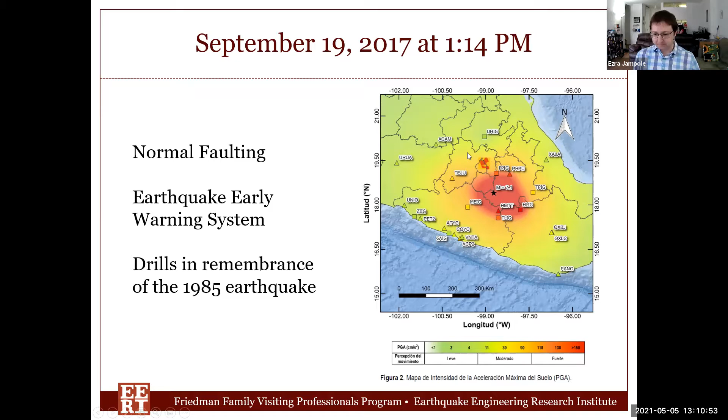Mexico City was not always a solid city. It was an island in the middle of a lake where the Aztec capital of Tenochtitlan was. The Spanish gradually filled in most of this lake to control flooding, and the consequence is that Mexico City looks like this today. Unfortunately, that filled in land has very soft soils.

So when earthquakes come, there tends to be quite a lot of damage that targets buildings of particular periods in Mexico City. This is something we saw in 1985, and this is something that we saw in 2017 as well. I'll show you a couple examples of the structures that the reconnaissance team saw while we were there.

This one is an auto repair building. One thing you may notice is that the upper levels of the building seem to have a lot more walls than the lower levels. This first level just has these small columns. This is something we call a soft story, where there's this vertical irregularity in stiffness.

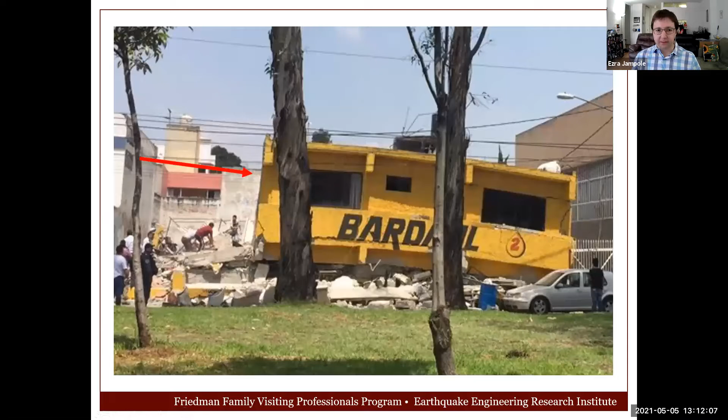What tends to happen in an earthquake is it will concentrate the damage at the weakest level, which in this case is this first level. Sure enough, that first level collapsed, and I believe a couple people were killed in this structure.

If we look at the actual site, after the rubble was cleared, we can see a couple things that are concerning. There's unreinforced masonry, and there also are some columns that don't have any stirrups. That means shear is not transferred very well through those, and they are quite weak.

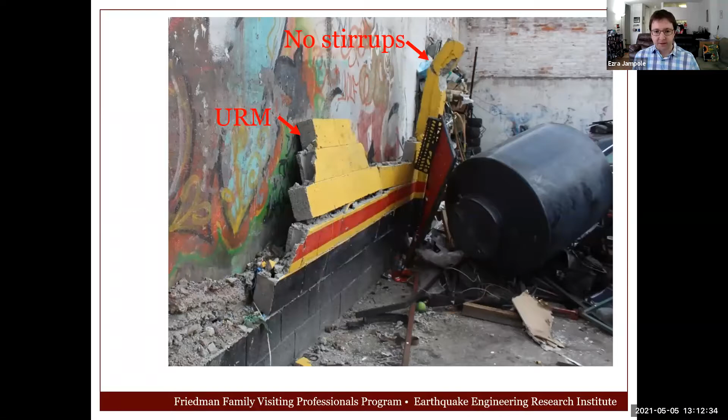Here's another example of a structure in Mexico City. One thing we often see when we have rows of buildings, and that's common in Mexico City and also certain cities in New York, is that the building at the end of the row will be most damaged in earthquakes. They act as a fuse for the rest of the row. You can think about it like a building being confined by other structures on the side of it.

In this case, this building was not at the end of the row, but it extended taller than the building at the end of the row. So the first couple of levels were confined, but the ones above it were not. Sure enough, we saw a collapse at this particular level in this building.

To tell you a little bit more about the study our EERI team did, we focused on areas where there were seismic recording stations, because that enables us to know with some certainty what the intensity of the earthquake shaking is. We went to 13 recording stations and investigated all the buildings around each station, giving us many data points on building performance.

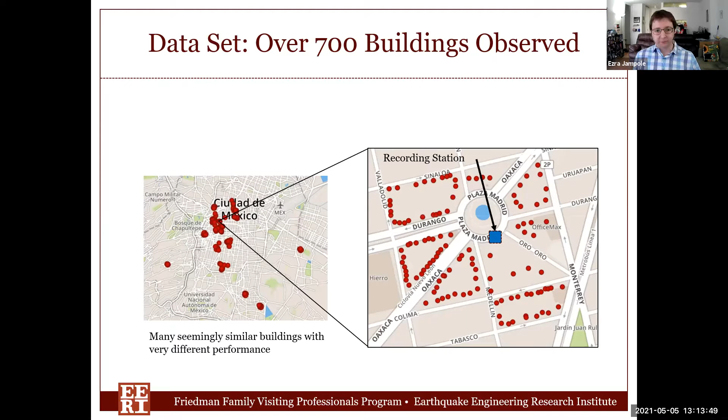This includes buildings that were damaged and buildings that were not damaged, as well as buildings damaged to various degrees. We recorded various attributes of the buildings, and we were able to use that to construct fragilities that relate the probability of some occurrence to an intensity of earthquake shaking.

We're using average spectral acceleration, which the seismic design team may be somewhat familiar with. We can divide that by buildings built before the '85 earthquake versus after, and by different heights, which is quite important because the earthquake, when it comes in contact with soft soils, tends to target only buildings with certain periods, and period is tied to height quite closely.

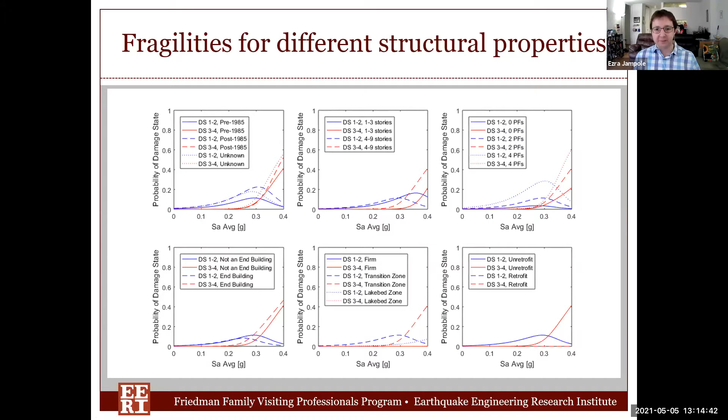So I hope that gives you a sense of the types of things that happen on EERI reconnaissance trips and the type of things that can come out of them.

Lastly, some of my more recent involvement is I was co-chair of the Younger Members Committee of EERI until about a month ago, and thankfully I'm no longer co-chair—it's a bit of a time commitment.

Something folks on the call may be interested in is EERI's travel study program, where if you're not experienced in earthquake reconnaissance and want to get experience, or you're just interested, you can travel to different areas with a group and tour relatively recent earthquakes and look at how the area has recovered long term.

I was part of that program, going to New Zealand in 2019. Here's a photo from that trip next to some fault scarp at the Leader Fault, which was a new fault from the 2016 Kaikoura earthquake in New Zealand.

So I hope that has convinced everyone to become a lifelong EERI member. There are really a lot of benefits to being an EERI member: the interdisciplinary aspect, outstanding technical journals you have access to, webinars, seminars like this one—unless you're sick of me by the end, in which case maybe that's not a benefit.

EERI as an organization provides a very clear path to transition from being a student member to a professional member, through things like the seismic design competition, the Student Leadership Council, younger members committees, and other committees that tend to be very welcoming of younger members. So if folks are looking to get involved in professional organizations, the barriers for entry in EERI are much lower than in some other organizations.

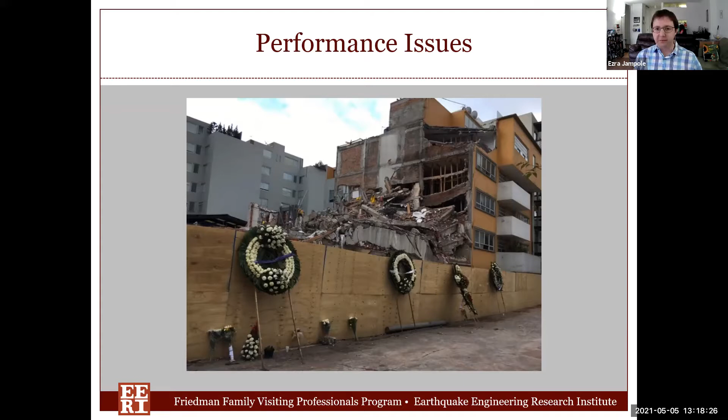There are a number of different fundamental issues that arise, and I'll show examples of all these, but I'd like to talk about them in a more general sense first. There's performance issues, and that's when a building has not performed the way that it is intended to perform. This is an example of that - another photo from Mexico City where a building collapsed.

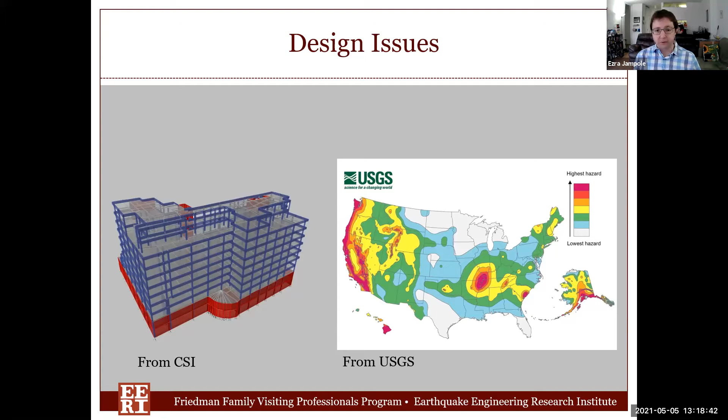There are design issues. So if something has not been designed the way it was supposed to be designed, say after it's built, there are concerns that it wasn't designed properly and it couldn't take the earthquake loading that it's required to, or other things similar to that.

So I designed and built a mechanism to pull laterally on those panels in place in the functioning office building and see if they could take the load or not. The coolest part was that I modified a tripod game hoist that usually is used to string deer, which quite frankly is disgusting to me, but it turns out to be a very effective device for testing whether or not panels can take code prescribed loads.

Getting away from this kind of silly example that was all too real for a while, construction issues often crop up related to delay cases. Contracts almost always specify that if construction work is completed early, then there's some benefit to the contractor. If it's completed late, then there's some benefit to the owner. We will often investigate if there were delays on a project, what the causes of those delays were - say it's the owner or the contractor or some supplier - and that has pretty large financial implications.

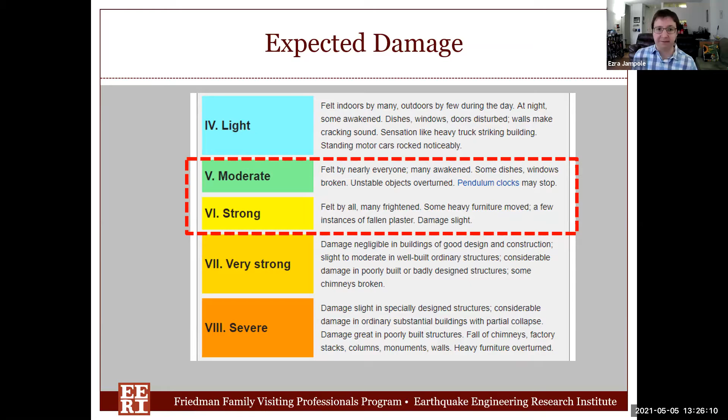This is something I talked about earlier, that the building at the end of the row can be a fuse. And we also see, and it's hard to see in a photo but it's easy to see in the field, that the building was leaning at least 1 degree, which is not good. So this is a building that is clearly compromised.

It's unreinforced masonry. I would not advise going into this structure. And sure enough, it actually blew over, or the front facade blew over in a windstorm less than a year later, and it since has been torn down.

So that should give you a sense that for a building like this, an unreinforced masonry building that's old, built turn of the century—the turn of the 19th century, sorry, turn of the 20th century, not turn of the 21st century—that there can be some real damage to structure.

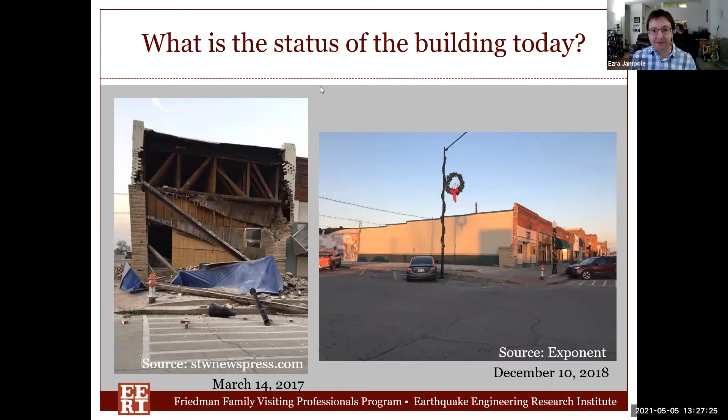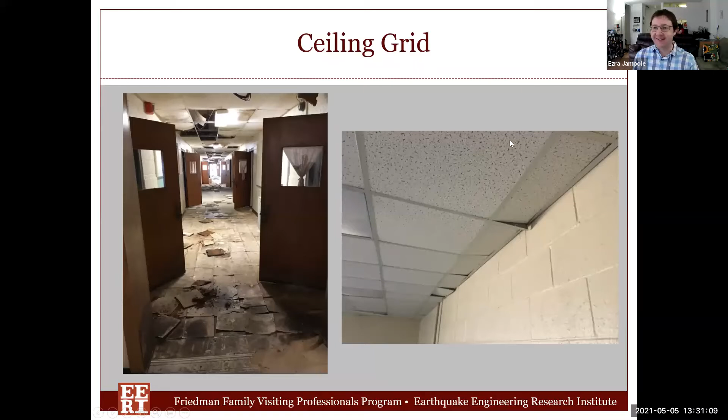And sure enough, we see a lot of these tiles fall out. I think in almost all of the buildings, a significant number of tiles fell out. Some of the dirt there might be because the building hasn't been used for a while though.

If no one else is saying anything, I'll answer again. But I just want everyone to get a chance to participate.

But this, I think, could be, but it could also be any kind of roof load that's strong, right? But that usually happens in the attic area. This is not the attic.

So I liked where you're heading with this, with the 'it could be.' I think that's probably the right answer.

So this is a partition wall. It's not bearing a lot of load other than its self weight here. So that means that if, say, the roof is deforming above it, it's not directly going to transfer to this wall. The wall is maybe mostly freestanding, and so it could, in theory, slide.

But it's questionable whether this was caused by the earthquake. And maybe it was. We do see contents, and we do see partition walls shift during earthquakes. So I would tentatively say that this is something caused by the earthquake, but it wouldn't be unreasonable to say that it was not caused by the earthquake.

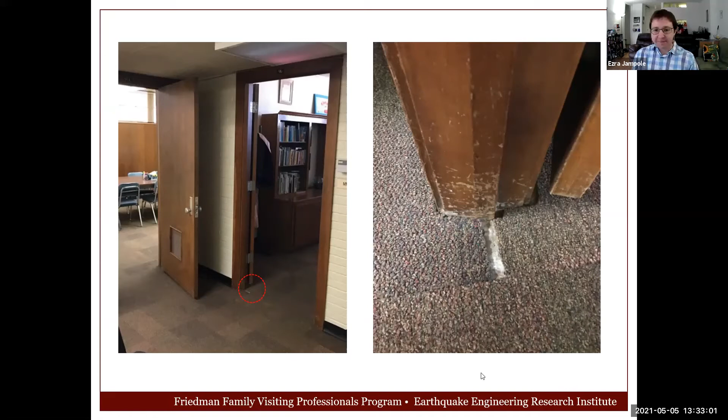So that would have been a good one for someone to answer, because no matter what you said, you can defend your answer and maybe be right. I probably should have done that first to encourage participation.

So is this something that is caused by the earthquake? I would say maybe not caused by the earthquake.

Because when you build a new structure onto an old one, there's, I guess, damage in the construction—you're pouring new concrete onto old concrete, and there might be some damage in doing that. But also the interface between the old building and the new building would be sort of different, and maybe that wasn't done too well, and it could have been caused by some other issue, some other activity that could have happened in the building other than the earthquake.

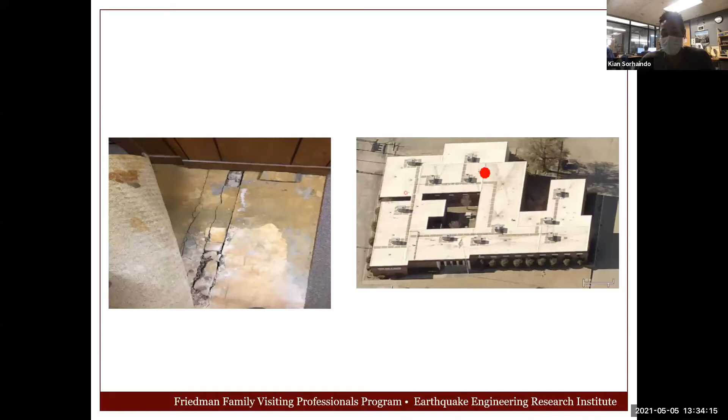Yeah, interfaces are tricky, and I think you're right that it was maybe caused by something else. So something that's common in Oklahoma is you see a lot of expansive soils, and so when you have buildings at different vintages, the soil is going to settle at different rates as well.

In either case, you don't necessarily have a firm connection between those structures. So this might have initiated pre-earthquake, and then the earthquake may have caused these sections to move slightly differently. Maybe there were issues with the interface, but what initially caused this was probably not the earthquake.

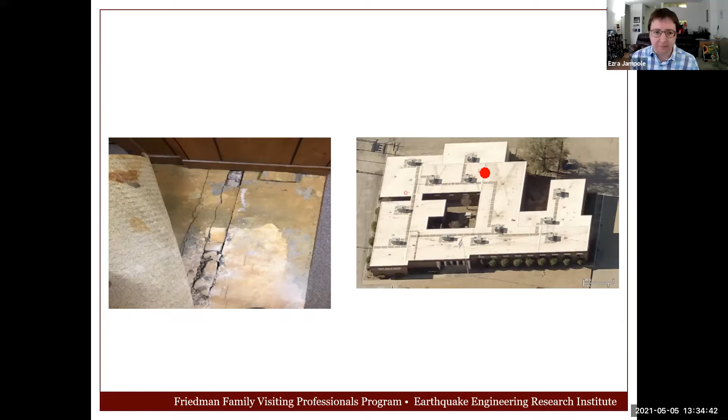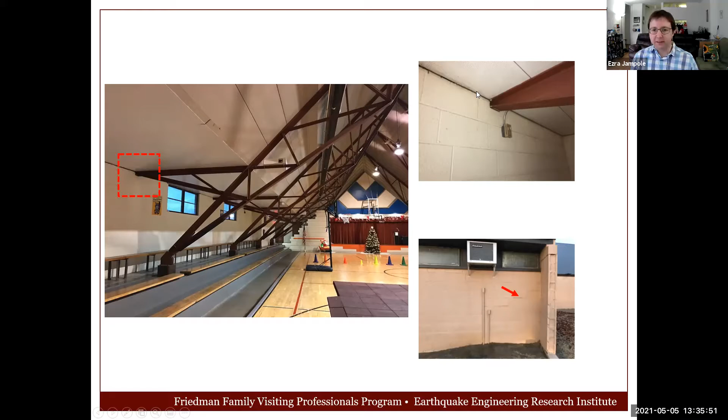So it's much more likely that settlement is the cause of this condition. And something that we see on the exterior—a similar location, not the exact location—we see some diagonal step cracks that are typical when there's differential settlement of the soil. So this separation and this opening that's coming up here is probably not caused by the earthquake.

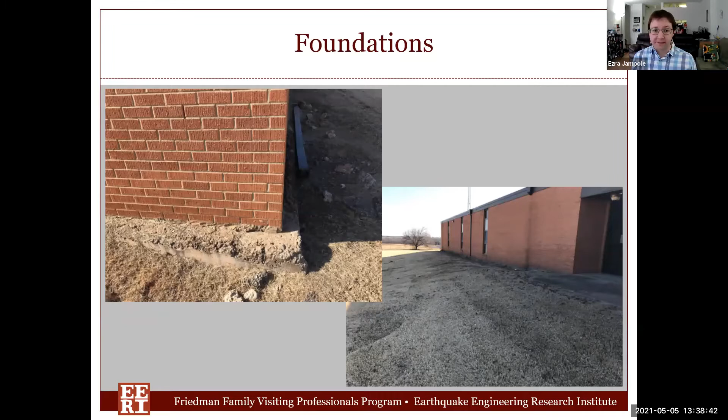Another thing that we saw at these sites is foundations that were exposed. Here we can see that, yeah, there's some cracks and maybe even a little spalling in this foundation, but it's very weathered. So when you want to determine if damage is caused by a recent event or not, it's good to look at how recent it looks. If the cracks appear to be weathered, if someone's painted over them, then that's a sign that it's probably not caused by the earthquake.

The last example I have is some horizontal cracks in the mortar joints of CMU walls. This is something that maybe was caused by the earthquake. However, we have to think about the consequences of this as well. So we typically will go to various guidelines that are published by, say, FEMA, in this case FEMA 306, that tells us that this type of crack may be caused by the earthquake, but you don't actually need to do anything to restore the structural performance of the building. So that's an interesting wrinkle in these cases.

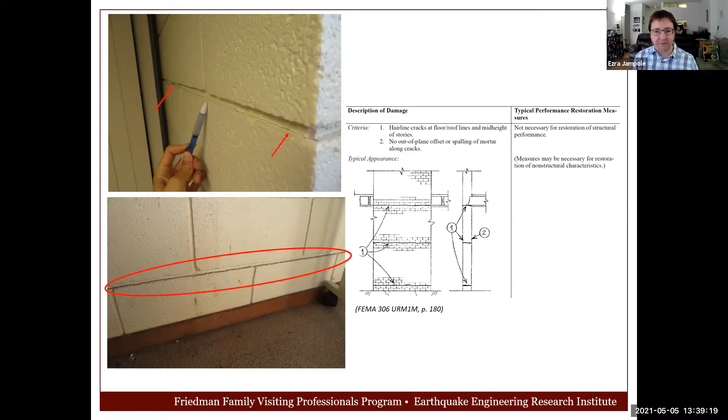So in summary, you should consider the extent of damage and if the earthquake is likely to target particular elements. I think that wind example is a good one where it's unlikely that it's caused by the earthquake, but there's damage, so maybe something else caused it. Identifying if there's weathering to damaged elements is very helpful in determining if it's caused by a recent event. Really think about whether it makes sense that the earthquake would have caused this, or whether there might be other causes. Finally, it's important to consider the consequences as well. If you looked at those cracks in the CMU joints and decided that the building was unsafe, then I would have a little beef with you, because that's not what the literature would support. So that's my first example.

I'm now going to go to an interesting, maybe more exciting example. This is a 12-story building on the West Coast. This building was built in 1923. It has a reinforced concrete frame, and it uses hollow clay tile, or HCT, infill and partition walls. So what that means is you have blocks of hollow clay tile that fill up between the concrete frame and the floor, and that provides some added stiffness to the structure. When the frame tries to deform, it's trying to deform all these blocks as well.

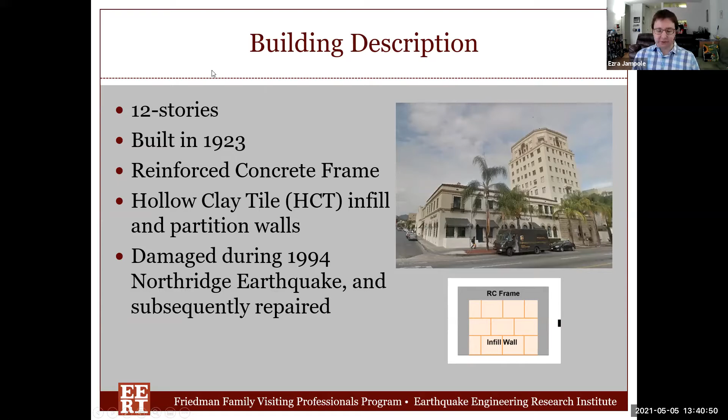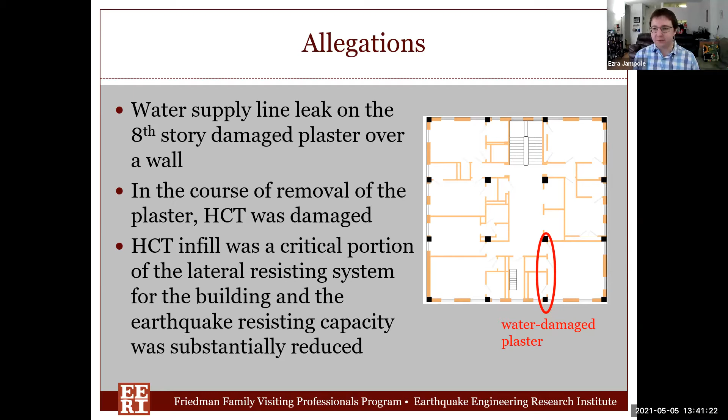This structure was damaged during the 1994 Northridge earthquake and was subsequently repaired. Many years later, long after the Northridge earthquake, there were allegations that a water supply line leaked on the 8th story of this structure and damaged plaster on the wall. Then in the course of removing the plaster, the HCT infill was damaged. The allegation is that that HCT infill is a critical portion of the building's lateral resisting system, and the earthquake resisting capacity was substantially reduced. So that's what the allegation is for the structure that I would investigate.

So how are these allegations supported? Well, someone created a numerical model of the structure, and they used software by CSI, which I think the seismic design team is probably pretty familiar with if you use SAP 2000.

And they modeled the structure, and then they modeled the infill as well. A typical way of modeling infill is to use equivalent struts in your model - a strut that can only take compression. You put two in opposite corners, and when the wall racks one way, it engages one; when it racks the other way, it engages the other strut. So they model the infill wall that way, using literature to support exactly how stiff and how strong those struts would be.

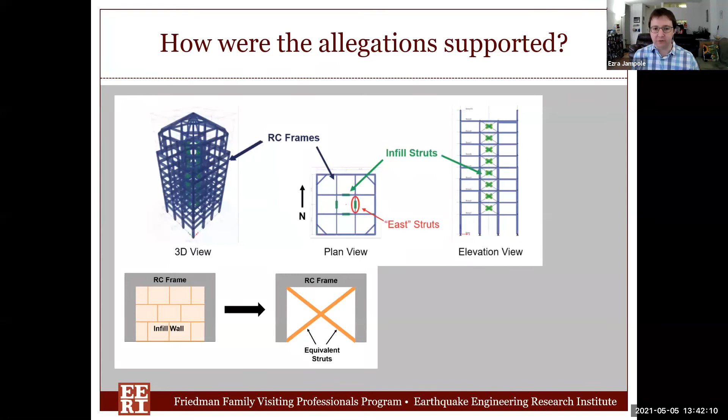So what they did was model the structure in an undamaged state and in a damaged state. In the undamaged state, they assumed solid infill between every single column - on the exterior and interior - looking at a plan view. Then for the damaged state, they said this one wall was damaged, it got wet, the plaster was removed, the HCT was allegedly damaged. So they took out all the infill on this wall and modeled the structure without it, then compared the results.

So at first blush, does anyone have any comments on this strategy that someone used to assess how the structure would perform in an undamaged versus a damaged state?

I guess it also depends on, because the wall can be a little bit damaged but still hold some load. I don't know if this analysis considers that scenario, because it also depends on which part of the wall is damaged. It might be more nuanced than just damaged versus undamaged.

Yeah, I think you brought up two good points. One, what's the extent of damage - is it appropriate to take out an entire line of walls entirely? And two, where is the damage? I had shown you that the leak was here, but they've taken out this entire row. So anything else?

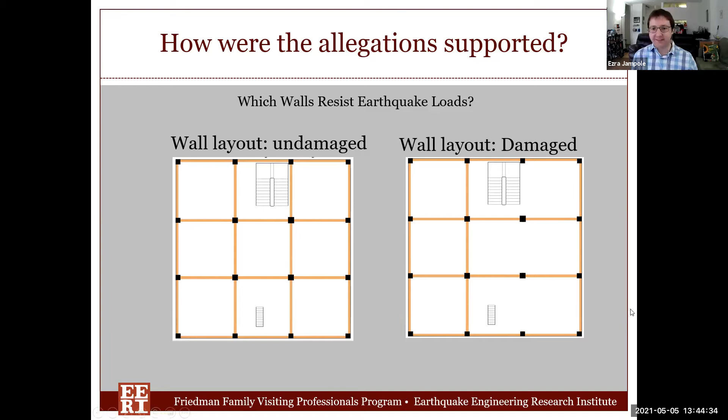So I think you guys hit on some of the major points. Another thing they did was when they subjected this to earthquakes - and I'll lean on the seismic design team to answer some questions here - they took a very famous earthquake recording, one of the first ever recorded: the 1940 El Centro earthquake. They scaled it down to 10% of the original recorded intensity in terms of peak ground acceleration, and subjected their numerical model to this very scaled down earthquake, using it to support their conclusions regarding the consequence of the damage.

So are there any issues with doing this? I think one I see immediately is they alleged this was damaged in the 1994 Northridge earthquake, which... So I'll jump in - it was damaged in the Northridge earthquake, that's just a fact. It was repaired, and then this is another event that happened after that. So that's just background information, I didn't mean to confuse with that piece.

I think where I was going with this is, I don't know if the ground motion they used, the 1940 El Centro earthquake, is accurate to the intensities and frequencies the building actually experienced. Exactly - so this is not representative of the shaking it experienced. If it already went through the Northridge earthquake, we have many recordings from that earthquake. Why not, in your analysis, subject it to something the building could actually see?

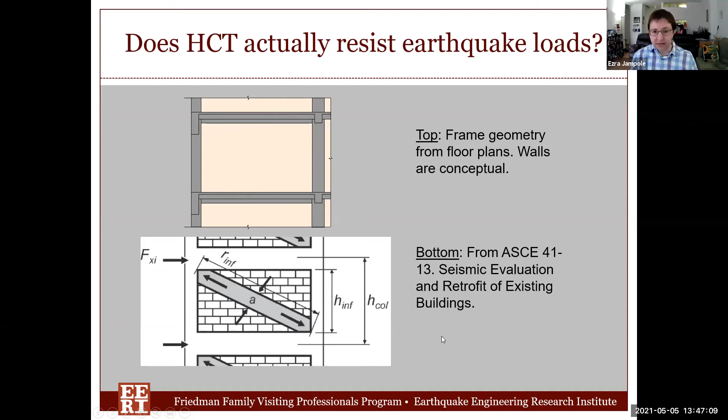So if you have filled in a frame, we're looking at some columns and beams or slabs, and you have it filled in solid, then you're probably providing some stiffness. You get some strut action here, and codes and standards will agree with you, and there are ways to model that.

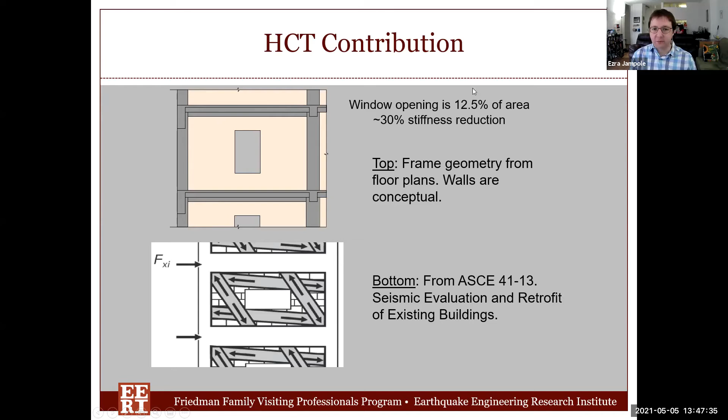The problem is that when you start adding openings, you significantly reduce the strength and stiffness. So we'll focus on stiffness here, but if we put just one window opening in, that's 12.5% of the area in this frame, you get a 30% reduction in the stiffness provided by the HCT. So one small opening significantly reduces the stiffness.

If you have a couple doors, and this was a typical situation we saw in this structure, people like to have doors in their buildings, you've reduced 42% of the area, but you've reduced 84% of the stiffness of the structure. So you're really not getting a whole lot out of that HCT if you have a lot of openings.

So if we consider that some of these are partitions, the HCT isn't coming up all the way to the underside of the beam. At the exterior, you have windows everywhere, you have doors at lots of them. Some of the partitions don't line up even with the column lines, so you probably aren't getting full HCT at every single column line.

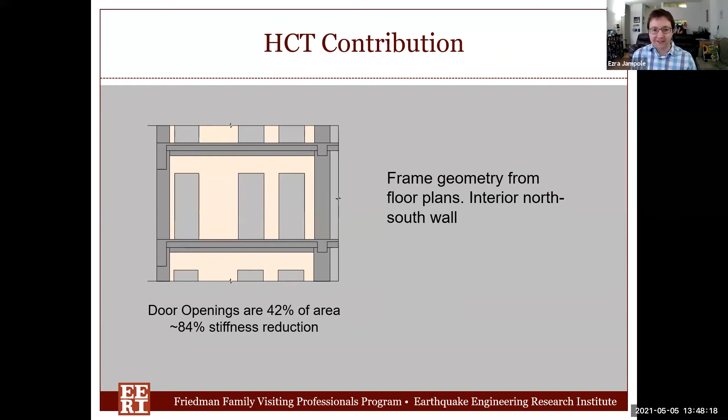So the consequence of this is that the way that structure had been modeled, there was a significant overestimation of the contribution of the HCT infill to the initial stiffness of the structure, and also an overestimation of the potential torsional irregularity in the structure.

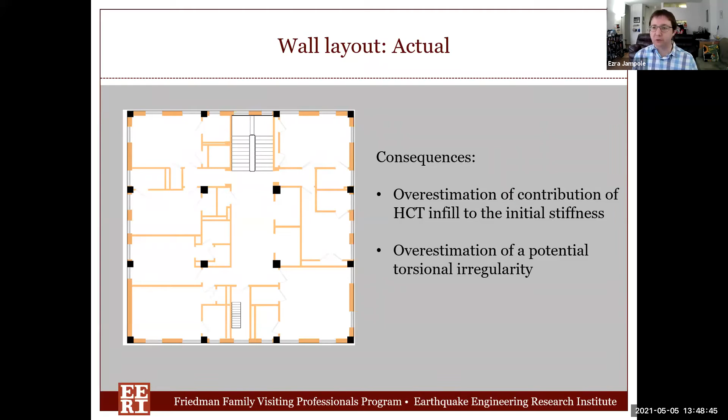So our investigation looked at what the actual intensity of shaking was in an earthquake that this building had actually felt. There was a seismometer in the Northridge earthquake that was less than a mile from the building. And if we compare the intensity of that earthquake from the Northridge earthquake to 10% of the El Centro earthquake, it's more than 10 times as intense.

So I'll pose the next question to you. What are the consequences of someone analyzing this building at a very low intensity instead of analyzing it at a higher intensity? Well, we've identified that it's not realistic, but what's the real consequence of that?

I guess some materials perform elastically to a certain extent, but once you scale up the earthquake, it loses its elastic property, so it kind of breaks.

I feel like the scaled down version might be insightful in that you can get some modal information regarding the building when everything's elastic, but that's not always the case when you have a severe earthquake.

Yeah, you're absolutely right about that. Once you start to get inelastic behavior of the materials, the performance changes quite a bit. And in particular, something like an infill material, where you expect that once you go nonlinear, you start to see blocks come flying off, and you lose your stiffness all of a sudden.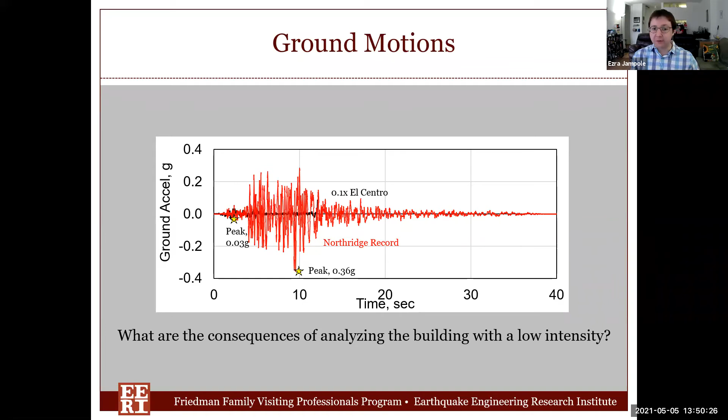So I'll try to conceptually explain this: if something is completely linear, as the earthquake intensity increases, the displacement goes up, and there's a linear relationship there. Now, if we look at how the force and displacement are related for the concrete frame versus the HCT, our concrete frame is initially stiff and then it flattens out, and starts to lose stiffness as you continue to increase the displacement. Very common behavior in all types of structures.

Which the HCT, at low deformations, the way this was modeled, would have high stiffness initially when that infill was really compacted. And then as the HCT increases in deformation, it has reduced stiffness.

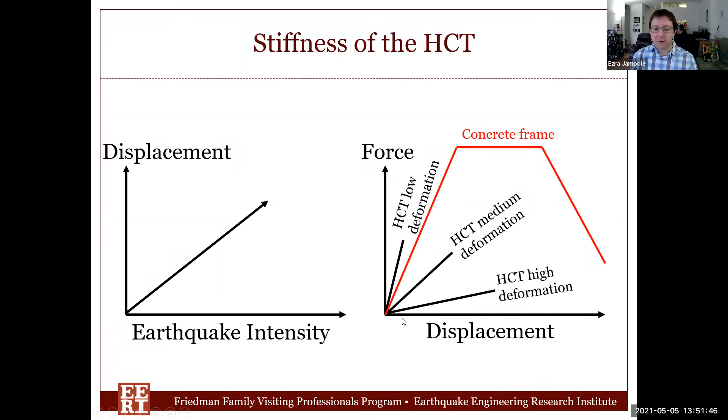So let's say you expected an earthquake that would have high deformation. The stiffness would be very low from the HCT, so it wouldn't contribute very much to the earthquake response of the structure. But at low deformations, it has pretty high stiffness, so it contributes more. So by analyzing the structure at a lower intensity, you're overemphasizing what the HCT contribution is to the stiffness of the building, and you would consider it much more important to the lateral resisting capabilities of the building than if you used a more realistic estimate of the earthquake intensity.

So we analyzed this structure using the models produced by someone else, then adjusting the models and subjecting it to the Northridge earthquake that the building had actually experienced. The displacement at the roof of the structure with 10% of El Centro was very small, and really wasn't so different between the damaged and undamaged response. In either case it was far less than the displacement the building had already undergone during the Northridge earthquake and had already been repaired for.

We found, and this was more of a material science thing that one of my colleagues looked into, that there was no evidence of damage to the HCT. That almost takes out the argument on its own, but also the HCT had a limited effect on the lateral capacity of the building. And the building had already undergone a much larger earthquake than that contrived 10% of El Centro.

So I'd say in summary that the analysis performed by others could have been a little bit better, a little more realistic. And when you correct for those things, really the impact is quite limited from the alleged damage to the structure.

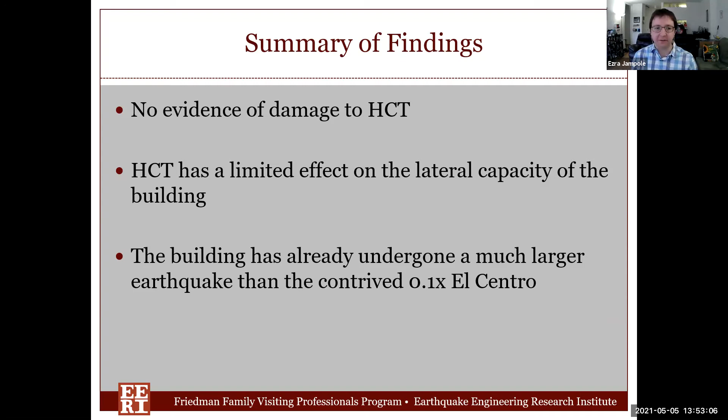I'll show one last issue that doesn't have to do with performance or alleged damage, but with design issues. This is an underground metro system in a high seismic region. Here's a photo, not of the actual underground metro system, but of another one, so that we can be in the right mindset.

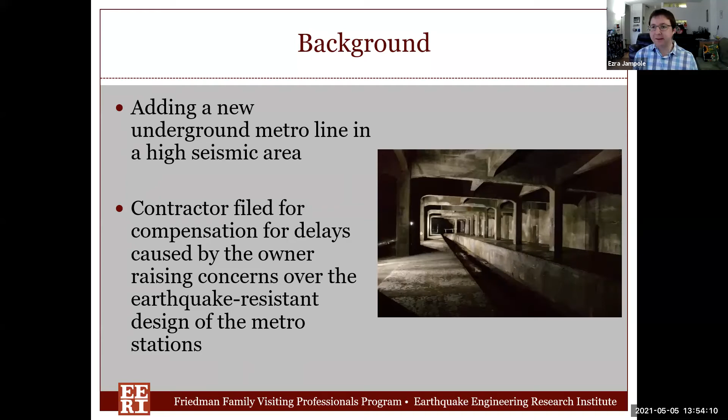Some background: the municipality was adding a new underground metro line in a high seismic area. The contractor filed for compensation for delays they said were caused by the owner raising concerns over the earthquake-resistant design of the metro stations. I talked earlier about how there were often disputes when a project was delayed over whose fault it was. In this case, the contractor said the delay was caused by the owner raising concerns with the earthquake-resistant design - they shouldn't have, that's why we were delayed. So pay us some money - it was hundreds of millions of dollars they were asking for.

I'm going to tell you a little about the initial seismic design. I think this will be a trickier one for participation, but I hope people venture a guess. Then I'll point out some of the issues, and we can talk about whether the owner was right to voice concerns.

The original design used what's called importance factors, which adjust the elastic forces applied to a structure based on how important it is. An importance factor of 1 is a regular structure; unoccupied buildings might use something lower, and a more important structure might use something higher. There are different interpretations of what importance factor means, but conceptually you're designing for higher forces, or designing for better performance during the same return period event - a couple ways to look at it.

In this case, an importance factor was used for what's called important structures. There was a linear elastic analysis of a single station under a 1,000-year return period earthquake. Based on this, the contractor concluded the structure would behave essentially elastically under this earthquake, and that the design was suitable. So the question to us was: was the owner right to voice concerns for a design with this importance factor for an important structure, designed using linear elastic analysis of a single station under a 1,000-year return period earthquake? There were a couple other issues, more geotechnical focused, that I won't get into. Any thoughts on this? Any problems with the design?

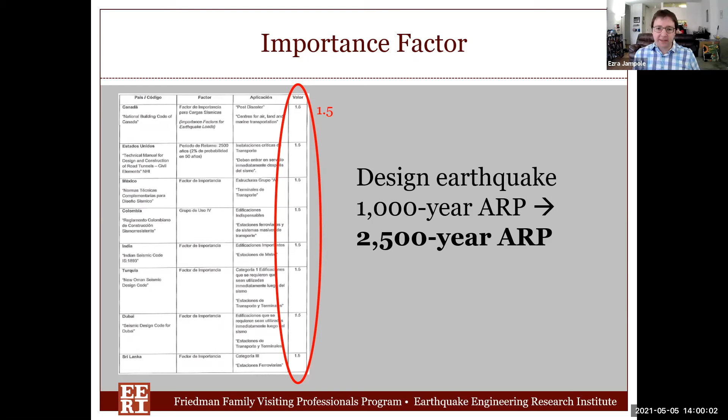In this case, we did research into what importance factors are used for similar structures, other metro stations, and found that it's actually more acceptable to use an importance factor of 1.5 instead of 1.3. A simplistic way of looking at this: if you increase your uplift on earthquake forces from 1.3 to 1.5, how does that affect the return period of the earthquake? The effect was going from an earthquake with a 1,000-year return period to one with a 2,500-year return period. That's one way to think about the effect of changing that importance factor. This could be very site specific, but it is a larger event that should have been accounted for.

Another point that was touched on was the need to perform nonlinear analysis. I'll conceptually show this. In a linear analysis, force and displacement are always proportional—it's linear. In nonlinear analysis, as you increase displacement, you reach a point where you no longer have to apply additional force to increase displacement, and eventually you lose strength and get a collapse.

So the consequence of including nonlinear behavior versus not including it, for earthquakes of the same intensity, can look something like this: we conduct a response history analysis, and the displacement with linear analysis looks relatively small. But when we include the nonlinear behavior of the system, we see this ratcheting type behavior, and a large permanent deformation of the system.

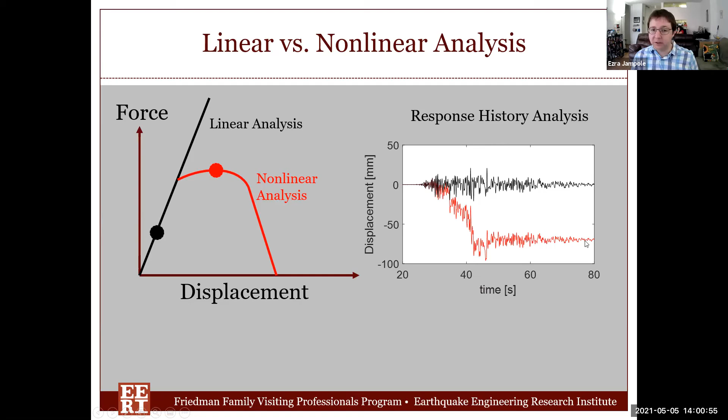Another thing that was done incorrectly is that there was an analysis of only a single station. This is a typical seismic map of a metro area, and when you have multiple stations, you will have very different intensities potentially at each one. So it's important to perform an analysis of each station—you may have different soil types at each too. So even if you expect the same rough intensity of earthquake, the way an underground metro station interacts with that structure could be quite different.

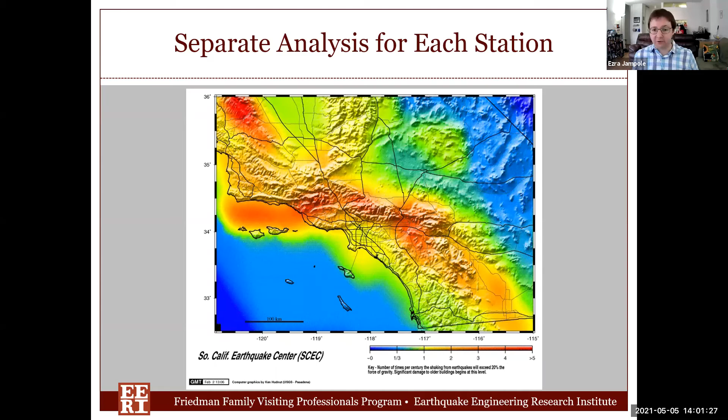After the concerns were voiced, subsequent seismic analysis was performed by the contractor, who conducted a nonlinear analysis of a single station, still using the 1,000-year return period earthquake, and using a single earthquake ground motion to represent the hazard at this site. There are a couple of issues with this as well—using a single ground motion is not appropriate for representing hazard at a site.

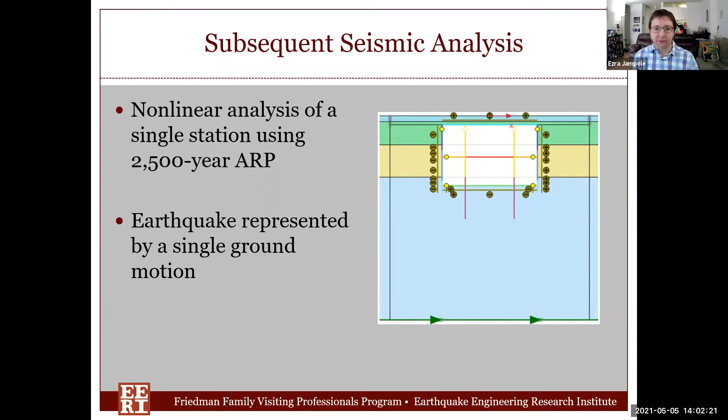What current codes and standards say—I'll use ASCE 7-16 as an example, it's minimum loads on buildings—you need to use at least 11 ground motions if you really want to understand things like collapse and performance during more rare earthquakes. So using a single ground motion is not a good representation of the site.

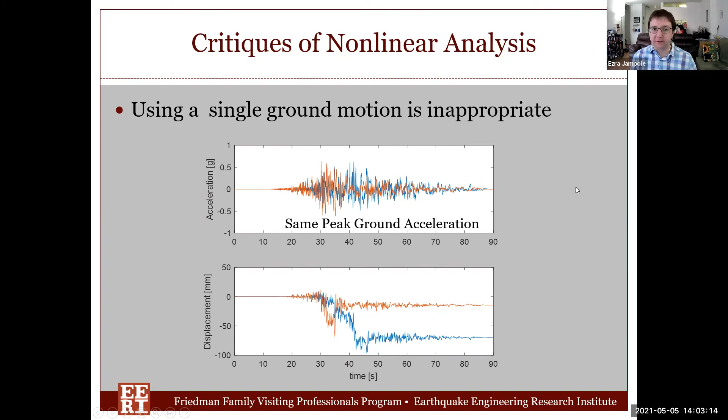That's significant. So in summary, we found that because of issues related to the importance factor, analyzing the structure using linear analysis instead of nonlinear analysis, and subsequent analysis that only looked at a single ground motion, it was appropriate for the owner to raise concerns with the seismic design and analysis of this metro system.

So that's it for my examples. I hope those were informative, and I have a couple of parting words that I hope are helpful.

You probably want to avoid a failure analysis if you're a designer. I recommend reading the codes and standards when they come out, and staying up to date on the latest research. An important thing is don't design out of your depth. A career is a marathon, not a sprint. You don't need to know how to do everything right away. You should start from your core expertise and expand your knowledge slowly from there, and you won't get into trouble.

On key decisions, think about how you would testify regarding those decisions, because you might end up testifying as a fact witness one day about a decision you made as a designer. And one way to surely stay out of a failure analysis in structural engineering is to drop out of structural engineering, though I hope no one does that who's on the call today.

So how do you get involved in a failure analysis? Well, you can ignore the things on the previous slide, but all kidding aside, I recommend staying in school and doing a master's or a PhD. You get a lot of additional coursework useful for analyzing particularly complex structures and understanding how different types of structures behave during earthquakes or other events like wind hazards and deterioration. A PhD is helpful because you learn to really dig into the weeds, though it's not strictly necessary for getting involved in failure analysis.